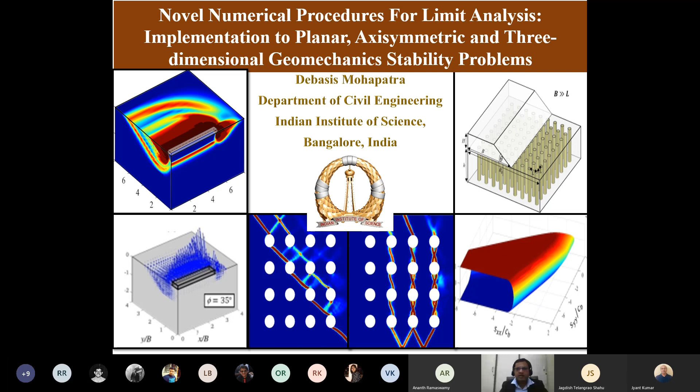About my dissertation work, which is on a novel numerical procedure for limit analysis and its implementation to planar, axisymmetric, and three-dimensional geomechanics stability problems.

This is the short thesis overview of my thesis. I have to speak a lot more, but the time is very limited, so I'm not going to focus on details about everything. I welcome questions at the end of my presentation.

At the beginning, I will introduce and discuss the theory of limit analysis. Then I will briefly discuss the objective of this present thesis work, and these blue colored points are my original contributions. I will briefly go through these contributions, and finally I will conclude the thesis by discussion about the future research work.

Stability problems are very common in mechanical and civil engineering, where we want to determine the maximum load carrying capacity of a structure, which is subjected to various complicated load, geometry, and boundary conditions. To solve this type of problem, we have different methods generally used.

These are the limit equilibrium method and slip line method. This limit equilibrium method and slip line method give very good, very accurate solutions. But the demerit is that these cannot be used for general purpose software development.

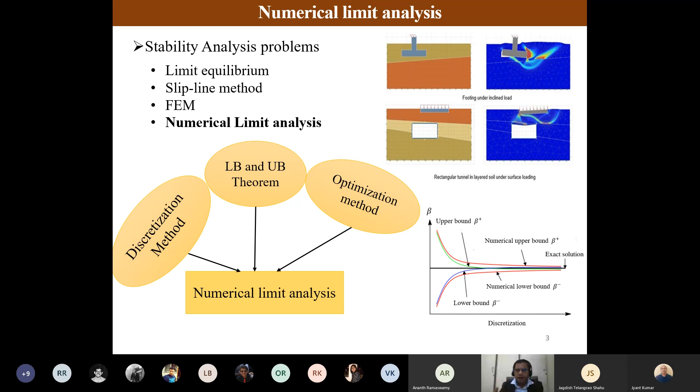These two problems are solved independently, and the exact solution lies in between these two bounds. Therefore, this itself is a self-validating kind of analysis.

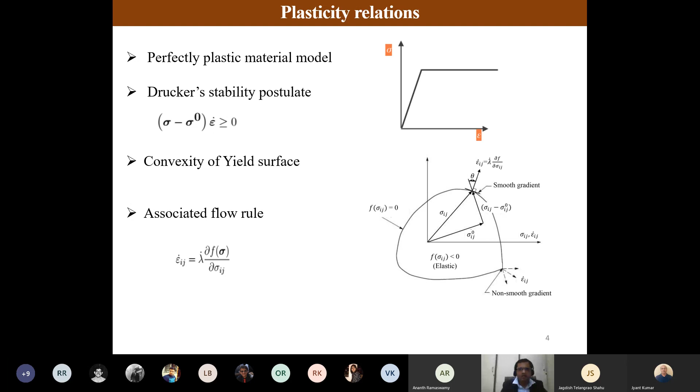Before proceeding further, we should be aware of what plasticity relations should be obeyed. So I assume the material is perfectly plastic, obeying Drucker's stability postulate. The yield surface is convex and the associated flow rule is being obeyed.

Under this condition, if omega is the domain of a body surrounded by boundary gamma, with displacement boundary condition gamma u and traction boundary condition gamma t, it is subjected to known body forces B naught and unknown body forces beta B. Beta is the load factor, the basic variable to be determined, and it is subjected to known traction T naught and unknown traction beta T. We also introduce some discontinuities within the boundary, because if a footing is resting on the soil domain, stress and velocity discontinuities are observed at the end of the footing, and these are well captured by introducing such discontinuities.

Based on these conditions, if we define the load, we obtain the load factor obeying equilibrium conditions, discontinuity equilibrium conditions, stress boundary conditions, and yield condition. The load factor obtained will always be lower than the exact load bearing load factor of the solution of the problem.

Therefore, we can convert it to an optimization problem to maximize the load factor to obtain the exact load bearing capacity factor.

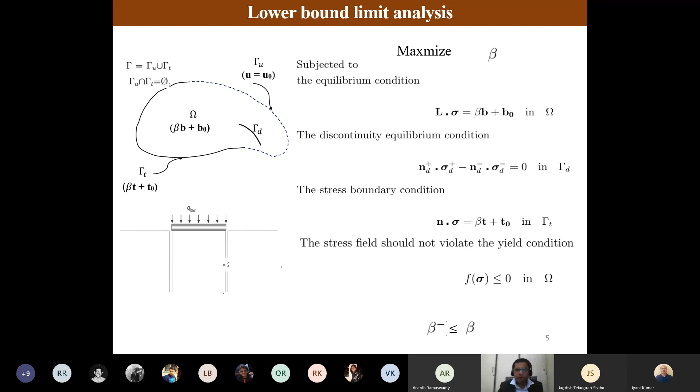For the upper bound limit analysis, we calculate the external work done by known body forces, pi naught, and unknown body forces, pi beta. The internal work done mainly has two parts: one due to power dissipation within the domain, and one due to power dissipation along the discontinuities. Then we equate this internal and external work done.

If the velocity and strain rate fields are kinematically admissible, the load factor determined this way always gives the upper bound to the actual collapse load. Therefore, we can convert it to an optimization problem to minimize the load factor to obtain the exact value of the load factor.

The load factor beta is always bounded between beta minus and beta plus. Therefore, we need to reduce the gap between beta minus and beta plus to obtain the exact value of bearing capacity factors. If analytical solutions are possible, then beta minus or beta plus will match directly. But for complicated geometry and complex loading conditions, these analytical solutions are never possible, so we need to use some discretization technique.

Before going to that, I want to mention that in lower bound limit analysis, stresses are the basic variables, and in upper bound limit analysis, strain rate or velocities are the basic variables. But the plastic power dissipation function and associated flow rule conditions are found to be dependent upon the stresses. So how to incorporate that into upper bound limit analysis will be one of the major research works of this present dissertation.

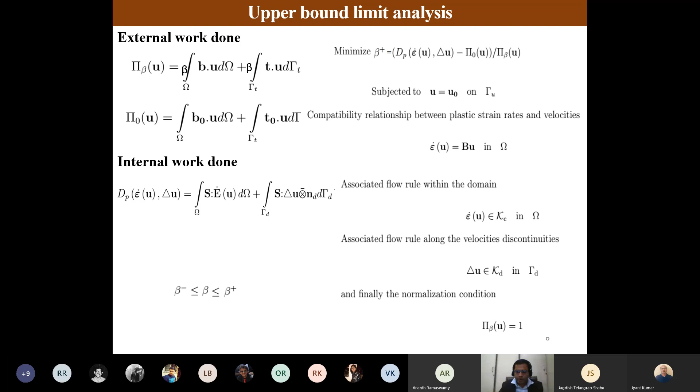If analytical solutions are not possible, we discretize the domain using finite element method, and obtain the constraints using lower bound and upper bound theorems. Using finite element method, those are converted to algebraic equations, and finally an optimization problem is formed, which can be solved using any optimization technique.

But the problems associated with finite element discretization are that lower order finite elements are generally used to obtain the rigorous solution, but the approximation by lower order finite elements is not that accurate, and volumetric locking issues always arise when modeling incompressible or nearly incompressible materials like clay and soil having low phi value.

Because the constraints associated with enforcing the flow rule condition exceed the degrees of freedom associated with the finite element method, no feasible mechanism could be developed.

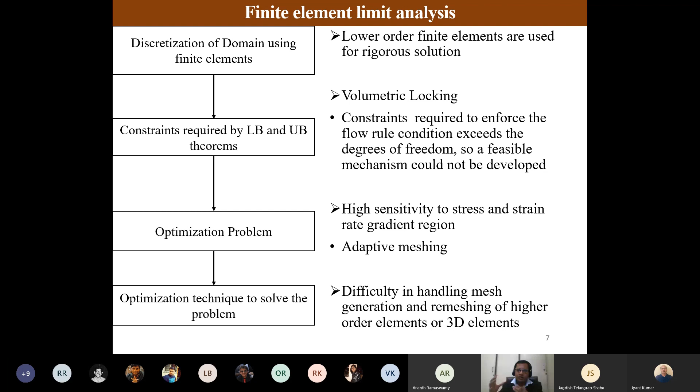Then there's high sensitivity to stress and strain rate gradients. Although adaptive meshing is a solution to that problem, generating unstructured mesh for higher order or 3D elements is quite difficult, and the adaptive meshing algorithm for higher order 3D elements is difficult and computationally not so efficient.

Another thing is we deal with optimization algorithms. The optimization problem we deal with is mainly nonlinear and non-smooth. Nonlinearity in lower bound analysis comes from the yield criterion, and in upper bound analysis comes from the dissipation function and flow rule constraints. Also, the yield function is non-smooth.

Therefore, in linear programming, we need a large number of constraints to satisfy, which is not a computationally very efficient approach. In nonlinear programming, the Hessian gradient should be well defined, which is not possible for the non-smooth yield criterion. That's why we need to approximate the yield criterion using some smoothing technique, which reduces the computational efficiency and accuracy of the approach.

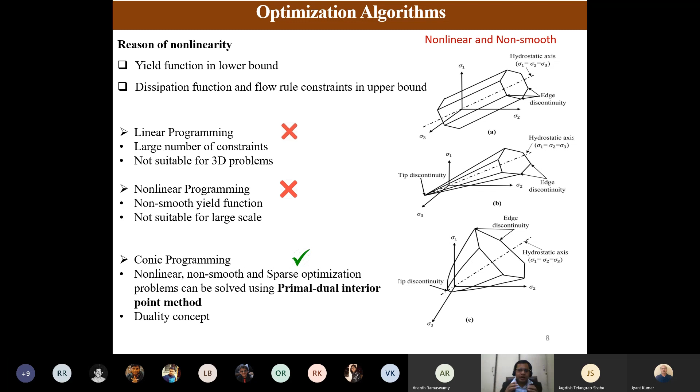Therefore, I have used the modern conic programming approach in this analysis. Although it has been used by some researchers, it is very efficient if the optimization problem can be formatted as a conic programming problem, since it can then be solved using an efficient primal dual interior point method. Another advantage is that we can easily define the duality of this programming. That's why it has huge application, which I will discuss later in this thesis.

Although conic programming approach has been used to solve Mohr-Coulomb yield criterion problems, how to solve rock mechanics problems or anisotropic or asymmetric soil mass problems has not been addressed by anyone. And although 3D formulation has been formulated, it has not been applied extensively in geomechanics problems, and that will be one area I need to explore.

Based on the literature review, I have condensed my objectives into four major areas: to formulate upper bound limit analysis problems using various discretization techniques, and expand the scope of conic programming to solve stability problems associated with soil and rock masses. As I have already discussed, the plastic power dissipation function and associated flow rule constraints depend upon stresses, but in upper bound limit analysis, I need expressions dependent only upon the kinematic variable.

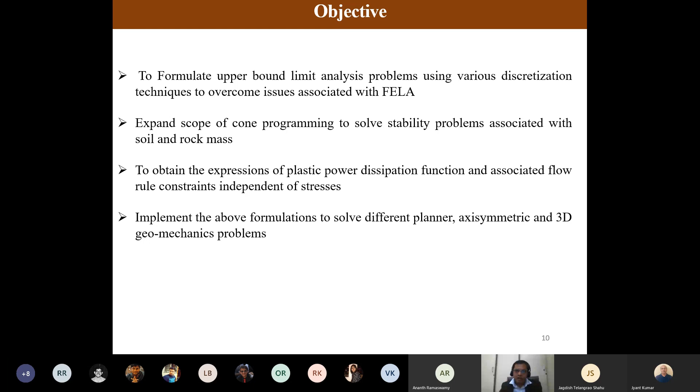That's why we need to derive expressions which are independent of stresses. That is one of the major objectives. And finally, to implement whatever development has been done to solve planar, axisymmetric, and 3D geomechanics problems.

Before proceeding further, I need to introduce conic programming. Conic programming is a type of program where the objective function is linear and the constraints and variables belong to different cones. Cones can be linear programming cones, second order quadratic cones, or semi-definite programming cones. In semi-definite programming cones, matrices are variables instead of vectors.

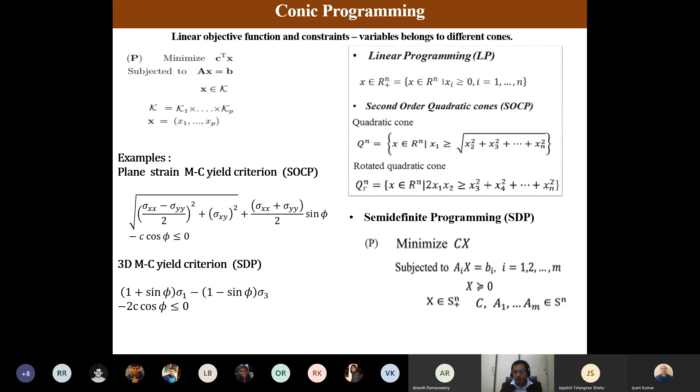For example, the Mohr-Coulomb yield criterion can be directly converted as an SOCP programming problem. But the 3D Mohr-Coulomb yield criterion, which is a function of eigenvalues sigma 1 and sigma 3, can be easily dealt with by using semi-definite programming.

This is my first contribution, in which I have proposed an upper bound finite limit analysis formulation for Mohr-Coulomb axisymmetric problems. The need for this study was that in axisymmetric problems, the hoop stress and hoop strain rate is introduced as an additional variable. So how to deal with that variable and what will be its contribution in yielding or defining the load bearing capacity needed to be addressed.

The second thing is that many people suggest that instead of constant strain triangular elements, if you use linear strain triangular elements, it can resolve the volumetric locking problem, or you can use velocity discontinuities. But I wanted to test the effect of different discretization procedures in obtaining the solution.

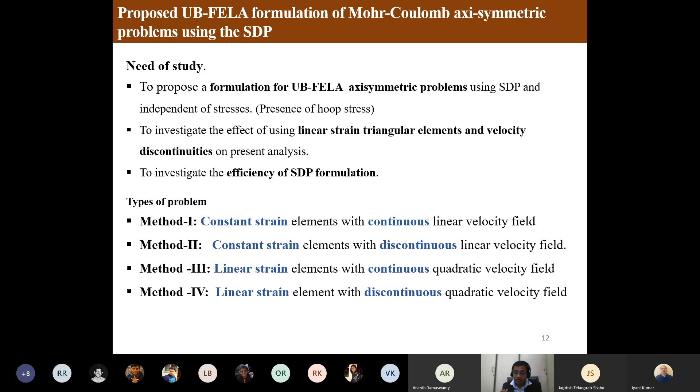That's why I used 4 discretization methods: constant strain with continuous and discontinuous velocity field, and linear strain triangular elements with continuous and discontinuous velocity fields. These 4 approaches were used to discretize the domain, and this diagram shows how the element discretization has been done and what variables are associated with each element.

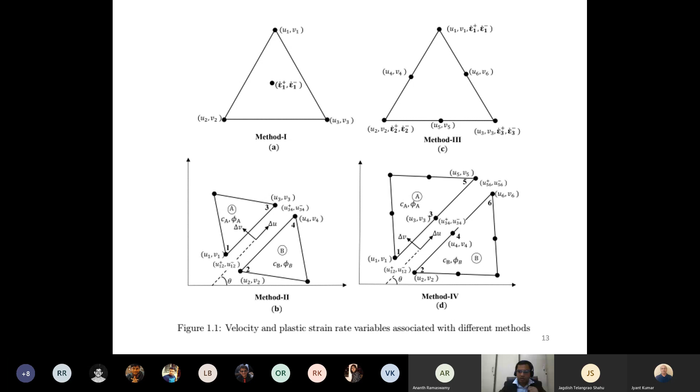I used this 3D Mohr-Coulomb yield criterion approach to solve my axisymmetric problem. So what I did in this approach, actually the strain rate is unconstrained in nature, but to solve it by using semi-definite programming, we need the variable matrix to be positive semi-definite.

To convert unconstrained, this can be done by expressing the unconstrained E matrix using E plus and E minus, a combination where both are positive semi-definite matrices. The physical meaning of E plus is strain rate due to dilation, and E minus is strain rate due to contraction. These expressions for the 3D Mohr-Coulomb yield criteria have been proposed by Martin.

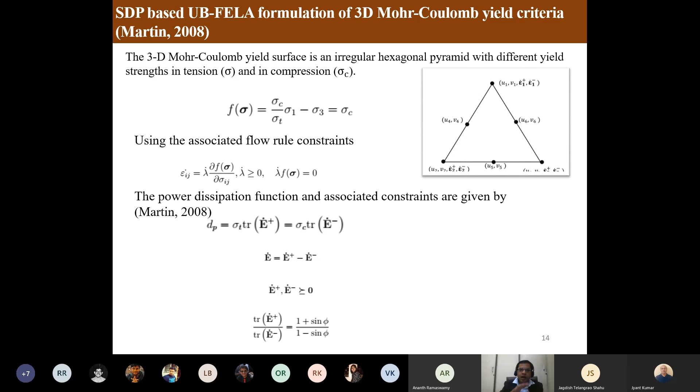I have made some modifications to consider my axisymmetric problem, and correspondingly I have generated the plastic power dissipation function and associated flow rule constraints.

I also need to consider the velocity discontinuity effect. For that, it is observed that the sign of delta V is the normal velocity jump along the discontinuity, and delta U is the tangential velocity jump along the discontinuity. Delta U can be unrestricted in sign, but delta V should be positive. So those things are addressed in the optimization problem as mentioned here.

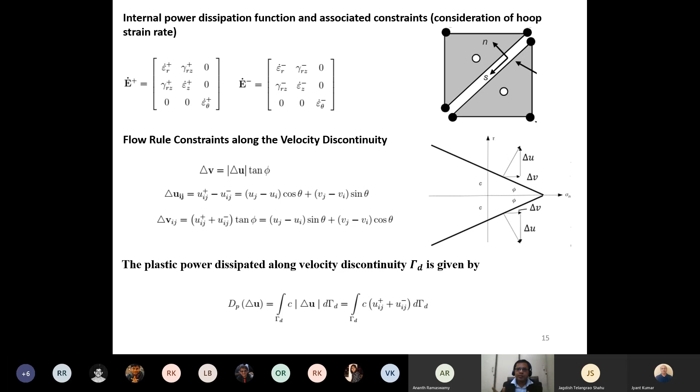I have also obtained the plastic power dissipation function along the discontinuities. Using all this basic knowledge along with the discretization procedures - the four discretization procedures discussed earlier - four different approaches to model the axisymmetric problem were generated, and used to solve an axisymmetric problem.

This is used to solve an axisymmetric circular footing problem. Here the elements are discretized such that a rectangle is divided into four triangles so that volumetric locking can be avoided. Also, wherever we know that at the corner of the footing there will be huge velocity and stress jumps, a very large number of elements has been provided there.

The results obtained show that, comparing with Martin's results which are based on the method of stress characteristics, the method 4 result - linear strain triangular elements along with velocity discontinuities - was found to be very close to Martin's results.

Other methods, method 3 (6-noded triangular elements without velocity discontinuities) and 3-noded triangular elements with velocity discontinuities, are found to be close to each other. But method 1, constant strain triangular elements, is not suitable for modeling this problem. Method 4 is found to be the best approach to solve this type of problem.

Method 4 takes almost double the time required compared to method 3. That's why I was dissatisfied, because first of all, if we don't address the volumetric locking issue by using this four-triangular division in a rectangle, we can't solve the volumetric locking problem properly. The second thing is we need to provide more meshes wherever required.

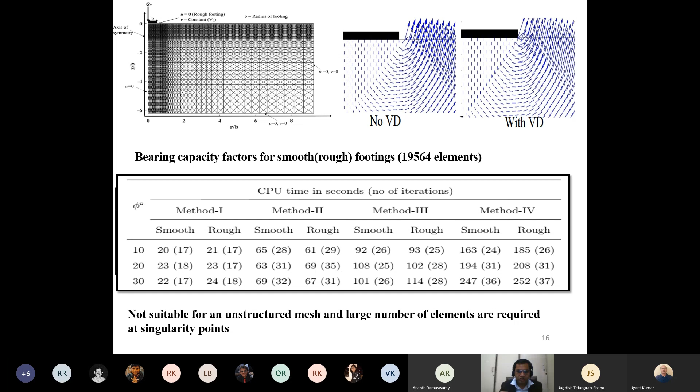That's why I was searching for advanced discretization procedures. The advanced discretization procedure I used here improves the solution of the 3-noded constant strain triangular element, because for constant strain triangular elements, many software packages are available for automatic mesh generation. It has automatic mesh generation capacity, helping us do adaptive meshing and unstructured mesh generation, capabilities other finite elements don't have.

This advanced discretization procedure is based on three concepts. First is the smoothened strain rate domain, where instead of evaluating the strain rate at one local point, the strain rate is evaluated as constant throughout the volume.

Using this, the domain integral is converted to a boundary integral. That's why instead of Gaussian points, we only need the length of the boundary, the normal of the boundary, and the Gauss point value at the midpoints to evaluate the integration and the strain rate. In this way, instead of a triangular element, we can use any domain to evaluate the strain rate.

Although velocity is interpolated as in a triangular element, for evaluating the strain rate we can use a different domain, called the dual domain. I used the dual domain concept to improve the factor of degrees of freedom by constraints per element, because this factor is very important for addressing volumetric locking. If this factor is higher, the volumetric locking will be reduced.

By using different dual domains, I formulated my strain rate vector. In the first case, it's a cell-based discretization. In the second case, it's node-based discretization, and another is edge-based smoothing domain formation. To the edge-based one, I added a bubble node, which was found to improve the solution very much.

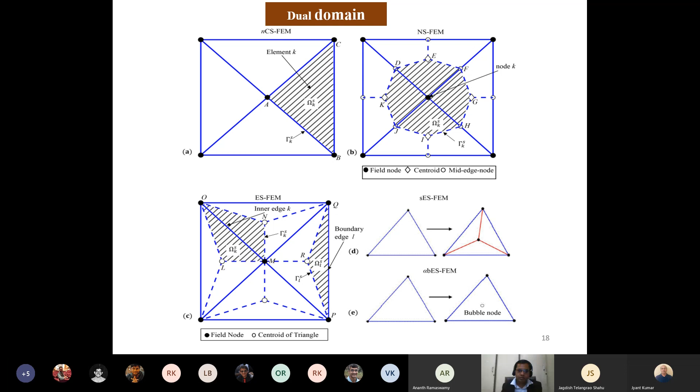I tested these five procedures and investigated which is the best procedure to address our problem, Mohr-Coulomb with limit analysis.

I used adaptive mesh refinement, based on two basic concepts. First is the posteriori error indicator, to indicate where mesh discretization is needed. Second, based on the error indicator, a mesh generator produces the unstructured mesh.

For the error indicator, I used the intensity of maximum strain rate. This was proposed by Martin: where the intensity of maximum strain rate is higher, more elements will be required.

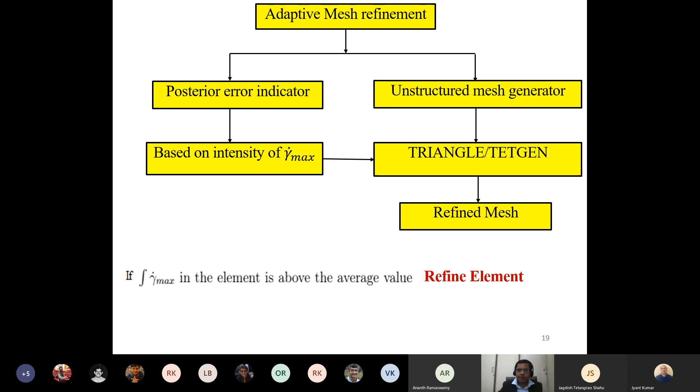Based on that, I used the Triangle software to generate the unstructured mesh. After each analysis, the error is determined. Where the error is more, a refined mesh is generated by the Triangle software. In this way, after 3-4 iterations, a refined mesh can be prepared.

The approach is: first we find the average strain rate over the domain and determine a targeted area. If the targeted area is less than the previous analysis area, we need to refine the mesh. If it is not less, we use the previous area as is.

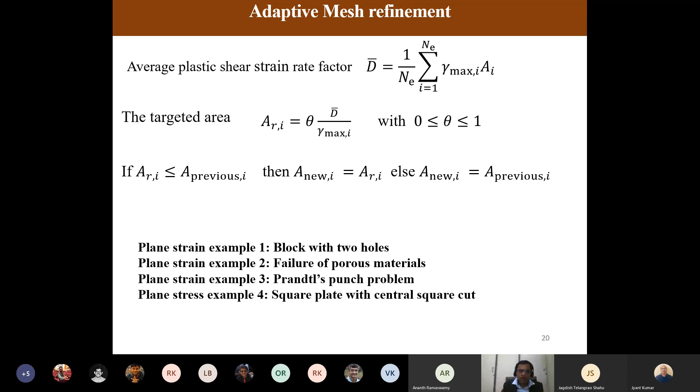Based on this, I solved mainly 4 mechanical benchmark problems and validated the results to find the best possible way to solve these kinematic limit analysis problems.

Due to lack of time, I'll discuss only one problem: the Prandtl punch problem, a strip footing problem. The objective is to determine the maximum value of load P. This was analytically solved by Prandtl, but here I used an initial discretization like this.

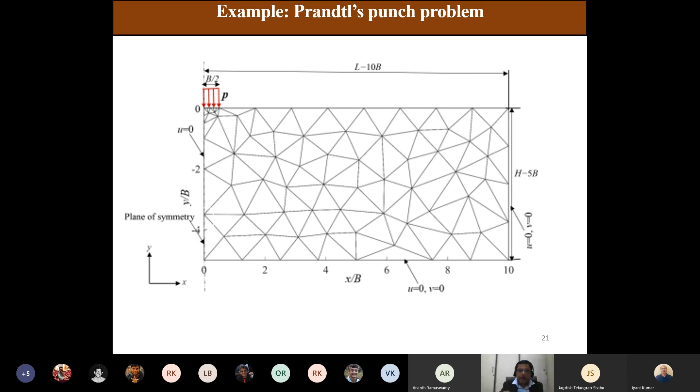After a few iterations, you can see the results.

Devashish, excuse me, which slide are you showing presently? Slide number? Okay. Slide number is 22. Oh, but here it is stuck. I think in mine it is showing 7 only. I don't know, anyway.

So Shahu, on the screen I'm seeing a take control option and a slide indicator. Please don't press take control. No, I am not pressing it. On the left hand side I see two arrows indicating slide 22 out of 59.

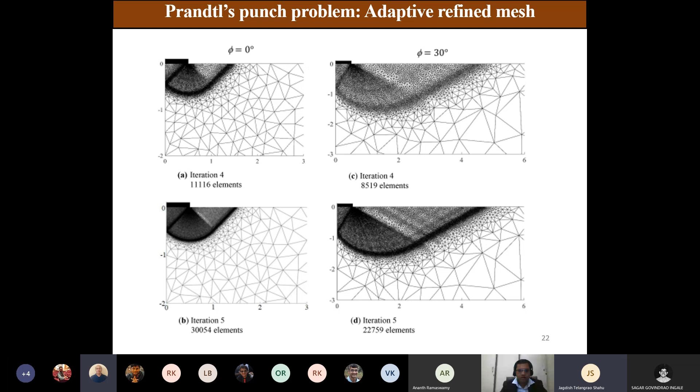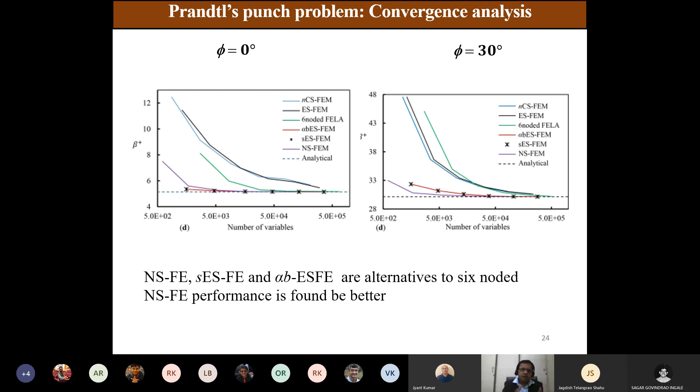Please continue. So this is how the plastic power dissipation function looks like. I have done the convergence analysis, and it is observed that the node-based smoothened finite element method, the selective edge-based smoothened finite element method, and the introduction of bubble node method are found to be alternatives to the 6-noded triangular element. It is observed that using very few elements we get a solution similar to the analytical solution, but I used more elements to check the stability of the numerical analysis, and these three methods are found to be quite stable. So the conclusion is that these three methods can be used as alternatives to the 6-noded triangular element. That is my conclusion from this work.

Then the next work is, I have analyzed an embankment resting on soft soil, which is improved by granular columns. This finite element modeling is quite difficult because introducing granular columns requires a very large number of elements to discretize the domain. Also, it is highly 3D in nature, so we can't use any simplification like 2D plane strain analysis, and direct numerical simulation is quite impossible in this type of structure.

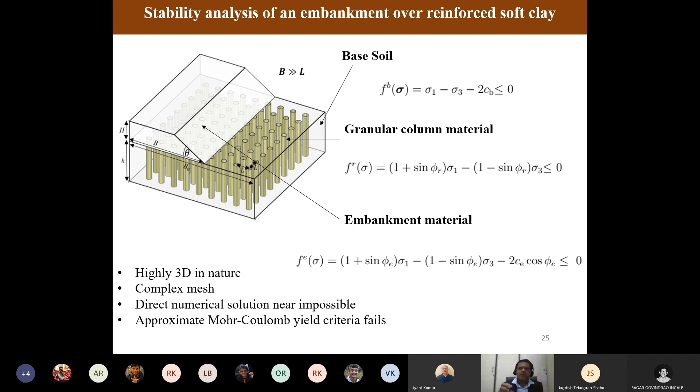So what I have done is address this problem by using composite material theory, homogenization theory actually. I have taken some parameters for how the mesh is and how the materials are. The base soil is a purely cohesive material, the granular columns are a purely frictional material, and the embankment is a combination, a C-phi material. I took this approach because it simplifies providing the stability charts.

So what is the homogenization procedure? If a domain is modeled by composite materials, modeling that domain directly is quite difficult. So we take a representative volume element and analyze it to obtain the modified property of the combined composite. We assume this property is obeyed throughout the domain, and we model the material using the property of the RVE, representative volume element, as a homogeneous material. So a similar concept I have used.

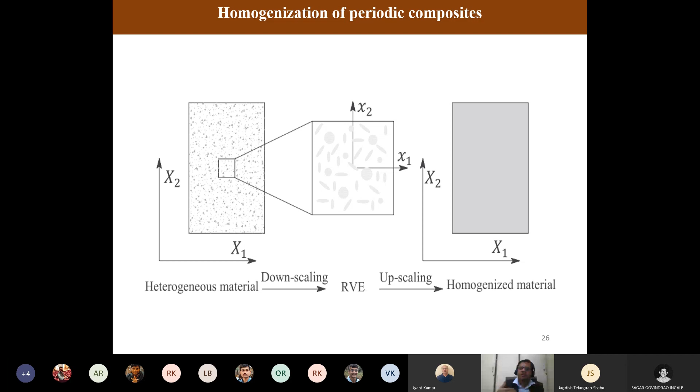I have taken a domain, a representative volume element, and analyzed it to obtain the combined yield criteria of the stone column and surrounding soil. Instead of the Mohr-Coulomb yield criterion or other yield criteria, I replaced it with the yield criterion obtained by solving this representative volume element. Although I don't need to solve the whole domain, I need to solve it using symmetry conditions and plane strain condition.

We need to solve only a small domain, and I have applied loads in different directions so that I can obtain the yield condition by varying the angles beta and delta. Wherever failure occurs gives a point on the yield surface. Similarly, loads are applied in different directions, varying beta and delta from 0 to 360 degrees, and the yield surface is obtained in this manner and plotted.

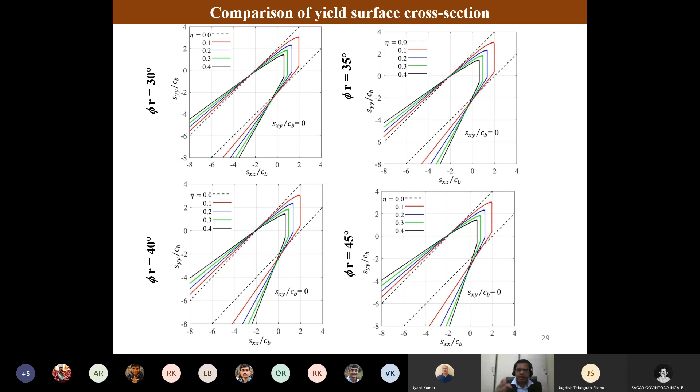So what I have done is used 7 ellipsoids to approximate this yield surface. I used a nonlinear least square method to obtain the parameters of the ellipsoids, and in this way the 13,000 linear constraints are converted to 7 ellipsoid constraints, which I have solved using this method.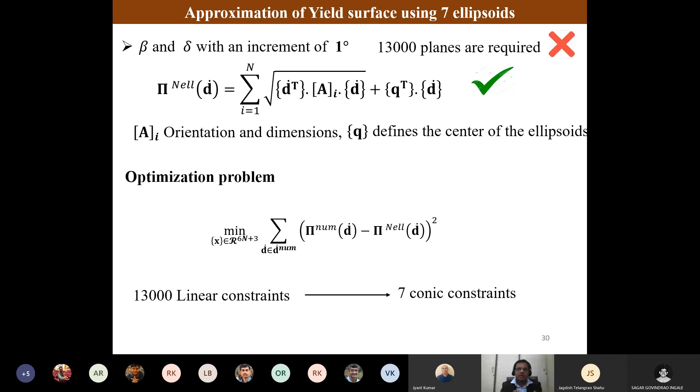Here the approximated result obtained from the 7 ellipsoids and the numerical solution is found to match very well with each other. So these are the following steps and parameters I have used to solve the problem.

And the steps are: first you give the input parameters, then analyze the unit cell to obtain the yield surface of reinforced soil, approximate that yield surface by using ellipsoids, and then add constraints to avoid the unboundedness of the strain rate direction. I mentioned it is unbounded in one direction.

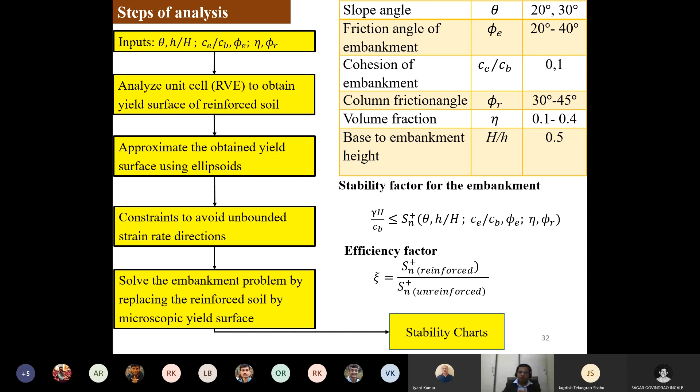Finally, solve the embankment problem by replacing the reinforced soil material using the yield criteria obtained from the RVE. This is done, and the different values obtained are presented in result format using stability factor and efficiency factor. It is found that this matches very well with the results reported by other researchers.

And this is the failure pattern generated. Initially, when there is no reinforcement, this was the failure pattern. With reinforcement, it can be observed that this does not go to the base, and this behavior is quite acceptable because the reinforcement increases the strength, which does not allow the material to fail in that direction.

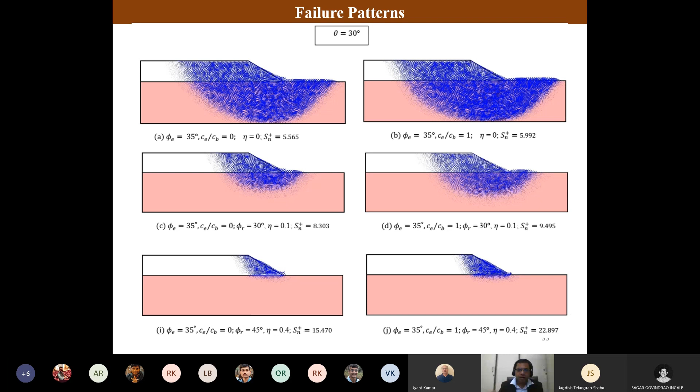So the next work was, as I have told already, conic programming formulations for Mohr Coulomb yield criterion are available, but what about rock masses, where the yield criterion used is Hoek-Brown yield criterion, which is very complicated in nature. Most importantly, the value of alpha also varies from 0.5 to 0.59.

Although it is observed that variation of alpha value has very less impact when GSI value is more than 30.

So what I assumed first to solve this problem is alpha equal to 0.5, and then by using the property of symmetric stress matrix, I converted this equation into these 5 constraints, where 2 constraints are conic SDP constraints, 1 is SOCP constraint, and the other 2 are linear constraints.

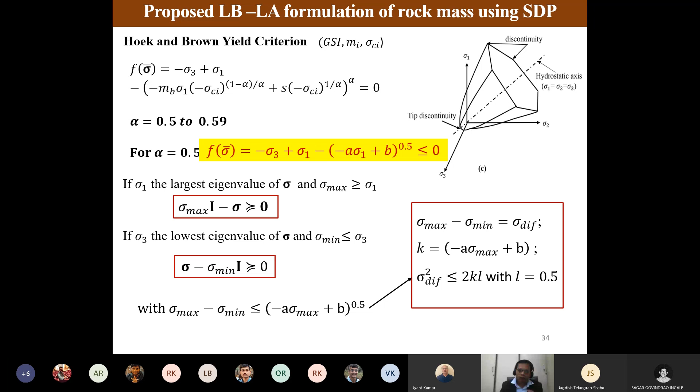So this yield criteria can be dealt with by using 2 semi-definite programming constraints, 1 SOCP constraint, and other linear constraints. In this way, I solved this SDP problem, and I analyzed the result by solving a strip and circular footing problem.

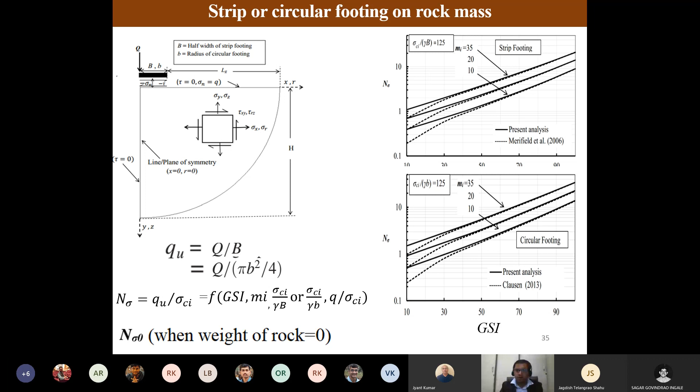As mentioned earlier, since I approximated the value of alpha as 0.5, for GSI less than 30, the behavior does not match with the behavior observed by other researchers. So to address that, I used an iterative approach.

This is the method I have suggested. After that, I have already discussed the plastic power dissipation function and associated flow rule as a function of stress. But we need to use upper bound limit analysis, which should be a function of velocities and strain rates.

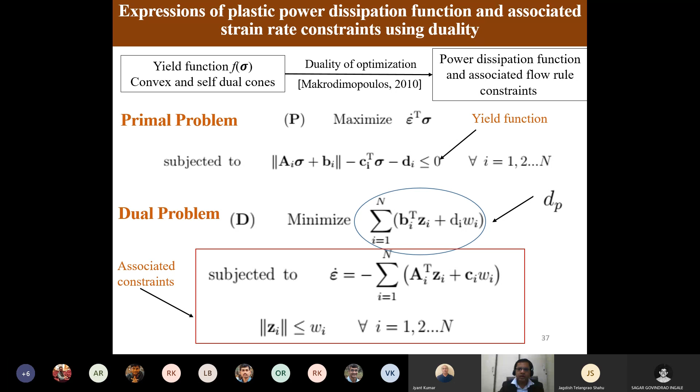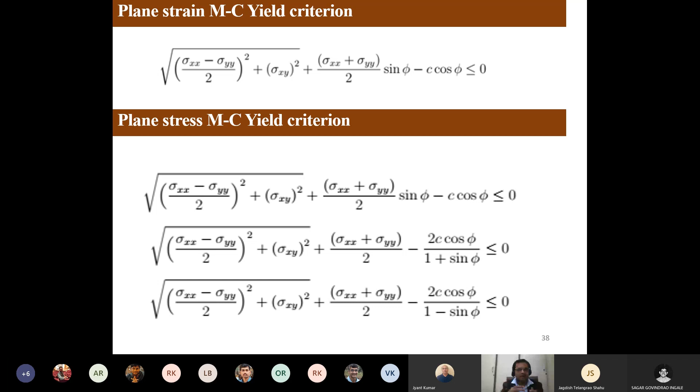This methodology I have used, and although Mohr-Coulomb yield criteria formulation using SOCP is already available, I used this methodology to verify whether our solutions are coming correct or not, also for Mohr-Coulomb yield criteria for plane stress and plane strain. It is observed that our solution matches exactly with the solution reported by other researchers.

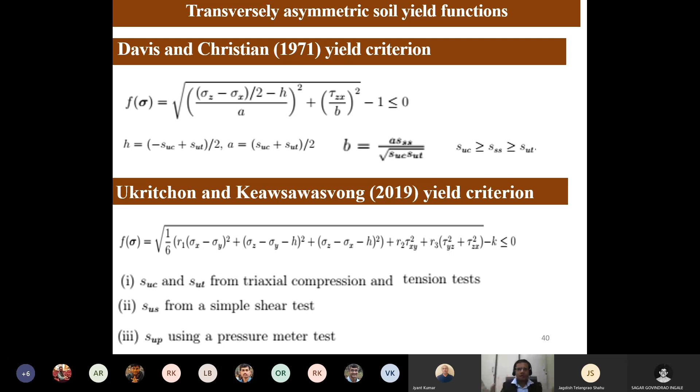Also, its 3D expansion, the Ukritchon and Keawsawasvong yield criteria, also comes under this generalized form of second order cone programming. All these yield criteria have been solved, with the plastic power dissipation function and associated flow rule constants obtained using duality of optimization theory as discussed earlier. The solutions have been obtained and verified.

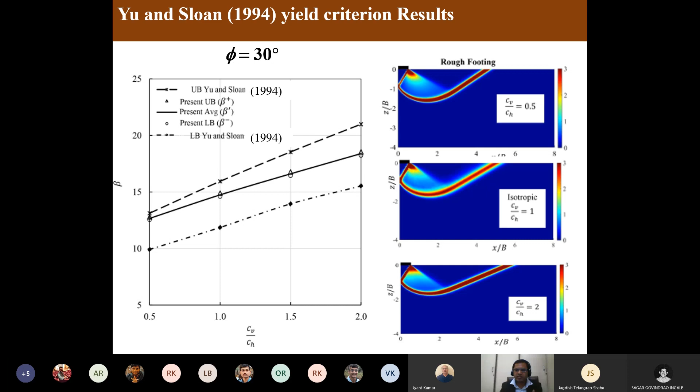I will discuss only one result, the Yu and Sloan yield criteria. It was already solved by limit analysis using a linear programming approach, and it was found that the gap between the lower bound and upper bound solution is too wide. But by applying our approach, SOCP duality combined with the linear strain triangular element, the gap between lower bound and upper bound is found to be very minimal, giving a much improved solution. Here the effect of anisotropy on the yield function and the plastic power dissipation function can also be observed.

So at the end, I have used the concepts of smoothened finite element method and conic programming optimization technique to solve a 3D rectangular foundation problem. The need of this study was to observe how to formulate the 3D kinematic limit analysis by using CSFEM and the radial point interpolation function, which is a meshless analysis approach.

There are many results available empirically or numerically, but there are many discrepancies. The shape and depth factor presented in the literature are considered independent, but it is observed that the depth factor obtained always depends upon the shape of the foundation. This is observed both experimentally and numerically. Also, the depth factor due to weight of soil is calculated as a combination of surcharge above the footing and unit weight below the footing, which is actually not the case.

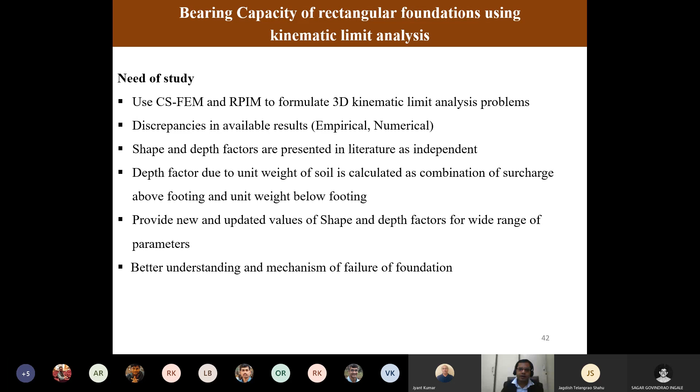It is a simplified method to calculate, where that needs to be addressed, and also to provide a new updated bearing capacity factor and to observe how the failure mechanism of a rectangular footing develops.

So I have used smoothened finite element method here by using a rectangular element, and also I have used radial point interpolation meshless method. The objective is that the interpolation is done by using radial basis function and polynomial basis function. Radial basis function is to address the singularity issue, polynomial basis function to satisfy the patch test, and the meshless analysis method is used as a validation to the CSFEM method.

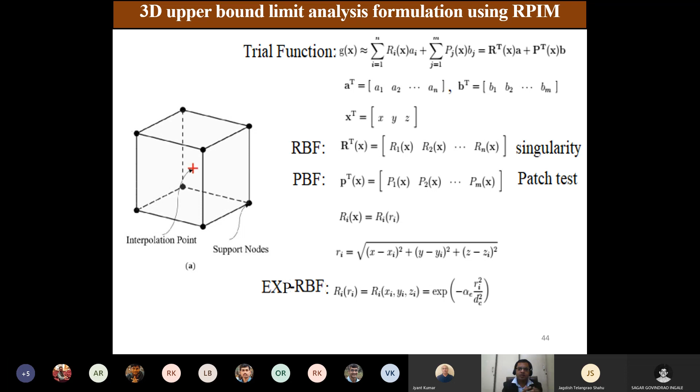It is observed that CSFEM method is more stable. That's why I have used the radial point interpolation method only to validate our result, whether it is coming correct or not. Also, this is the problem definition I have used.

Our foundation is at some depth, and the foundation's length - the thickness of foundation I have assumed as 0, because if I consider thickness of foundation as a variable, then it will increase the number of variables of the problem, and it will be difficult for us to provide the chart.

I have applied a vertical velocity in the direction of V naught, and I have assumed the footing is rough - that's why no velocities in the translational direction are allowed. Here the load Q is not due to weight of the footing, it is weight of the soil above the footing - it is additional surcharge load Q.

This problem has been analyzed. Another thing is that I have first obtained the shape factor, which is a function of L by B and phi, and the depth factor is now not only a function of D by B, it will be a function of L by B also.

This is observed from numerical analysis, by varying the parameter L by B from 1 to 5, D by B from 0 to 5, and phi from 0 to 45. This is the mesh discretization, and different charts have been obtained also.

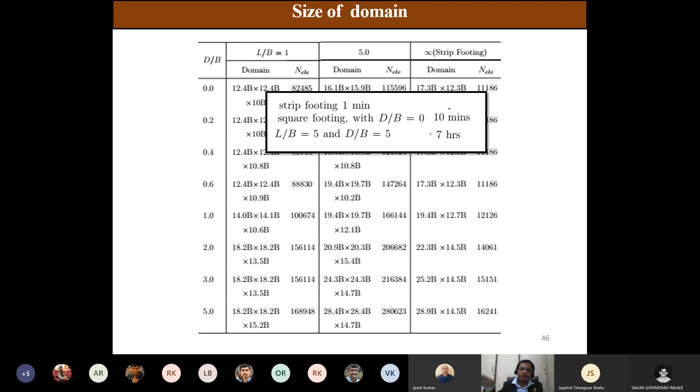The size of domain and number of elements required to discretize the domain is determined by using convergence analysis. It is observed that the final strip footing analysis takes 1 minute of time, while for a square footing analysis it takes 10 minutes. When using the large domain for which L by B is equal to 5, D by B is equal to 5, 7 hours of time is required to solve the solution.

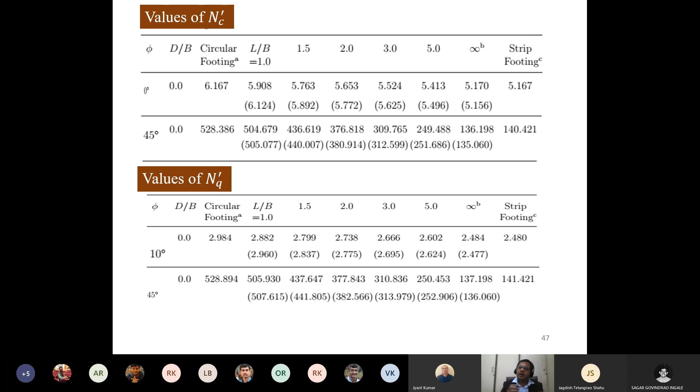These are some bearing capacity factors obtained. The bracketed results are obtained by using the radial point interpolation method, and are found to be quite well matched with the CSFEM method. But as I mentioned earlier, CSFEM is more stable in solving the problems.

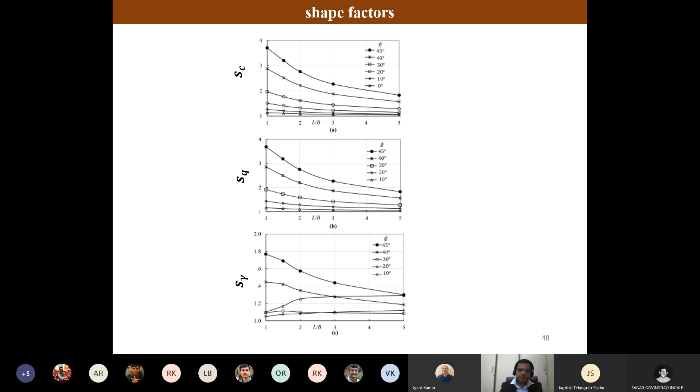That's why I have solved most of the depth factors using the CSFEM approach. This is the value of shape factors I have obtained, for different values of phi and L by B. It is observed that shape factor S gamma follows a different trend than SC and SQ. The depth factors are also obtained from different analyses, and have been reported.

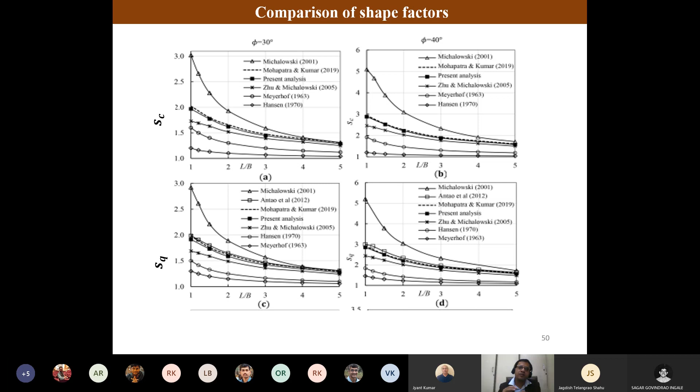It gives a slightly higher upper bound than the finite element results obtained, which proves that our method is quite good.

If you compare the depth factor, there are no numerical results available for it. That's why I compared my results with the empirical bearing capacity factors proposed by Hansen and Meyerhof. But you can see the difference.

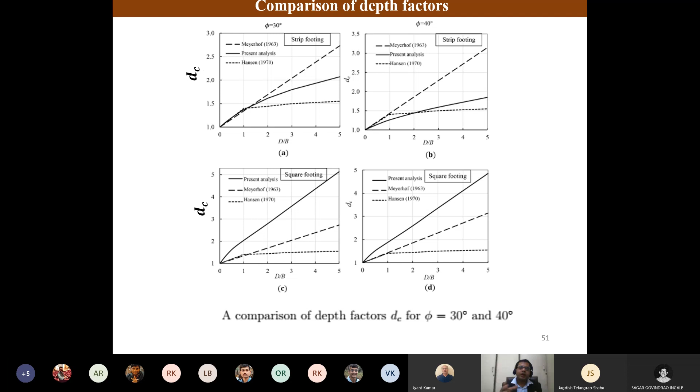This black line is my result, and the dotted lines are their results. It is observed that Meyerhof and Hansen's results show no variation in depth factor with change in the shape of the footing, which is not found to be correct in our analysis, and this is also observed experimentally.

We have also presented the values in chart form, and this has been published in a good journal as well.

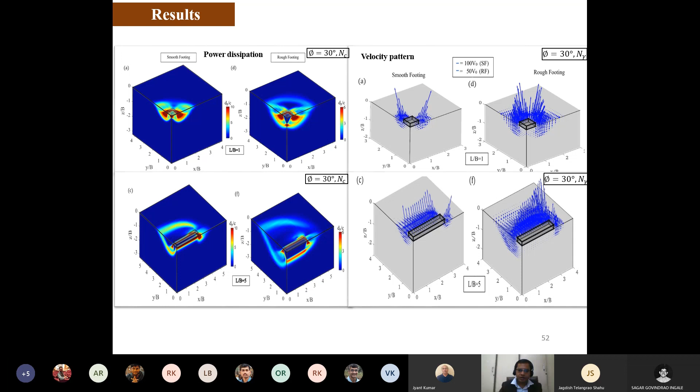Finally, these are a few diagrams showing how the velocity and plastic power dissipation function develop, and also how the plastic power dissipation function develops when placed at some depth.

With that, I am going to conclude this presentation. These are the major contributions. An upper bound limit analysis formulation has been proposed to solve axisymmetric problems using SDP, higher order elements, and velocity discontinuity.

Advanced discretization techniques, which consider smoothened finite element, dual domain, and adaptive meshing procedures, have been used to solve kinematic limit analysis problems.

It is observed that node-based smoothened finite element method, selective edge-based smoothened finite element method, and edge-based smoothened finite element method, along with addition of a bubble node, provide a better alternative to the linear strain triangular element traditionally used.

A 3D formulation for kinematic limit analysis using CSFEM and radial point interpolation method has been proposed and implemented to solve the bearing capacity factor of rectangular and square footings.

The lower bound formulation for rock mass using the Hoek and Brown yield criteria has been proposed.

The plastic power dissipation function and associated flow rule constraints for anisotropic and transversely isotropic soil have been proposed and validated with available results.

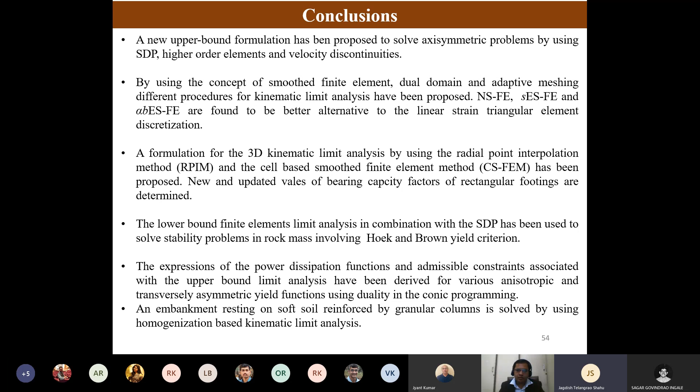So I think they are okay? Yeah, they are okay, if tension is positive. Just a minute, 8.2, let me check out. Okay, it is something related to the tension and compression signs. Yes, I hope so. So you have taken tension positive? Generally in geotechnical engineering, they take compression positive to express those things, but I have used tension as positive. That's it.

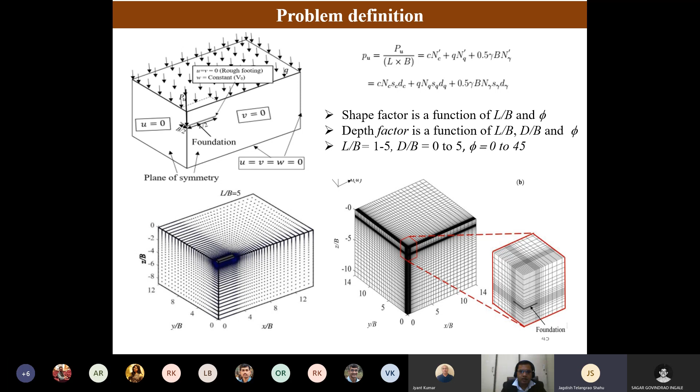Then you have used the unit cell concept. Yes sir. So what is the assumption made for the unit cell concept? Can you tell the basic assumption? So the basic assumption here is...

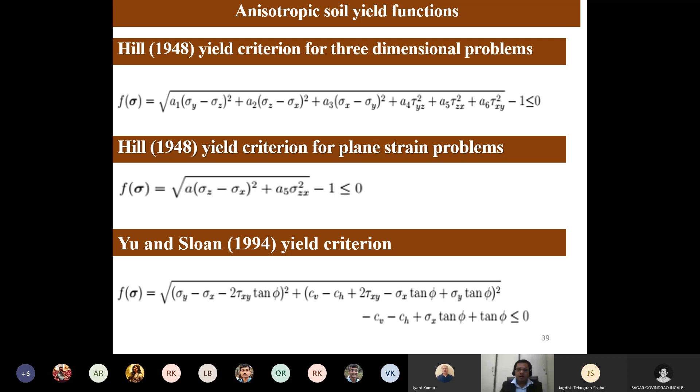I am assuming soil to be isotropic, and the model of one unit cell does not depend upon the model of the nearby unit cell. Whatever parameters are obtained for one unit cell does not depend upon the nearby unit cell; both are independent. Also, I am assuming that the unit cell nature has been periodically followed throughout the structure. This pattern is periodically followed.

And in the third direction there is no other loading; it is a 2D case, with no vertical load or variation of loading in the third, Z direction. So for your problem which you have taken, is the unit cell concept applicable? Yes, I have told you already, it has been used in finite element analysis very frequently, because directly solving this type of problem using finite elements is difficult due to the number of elements.

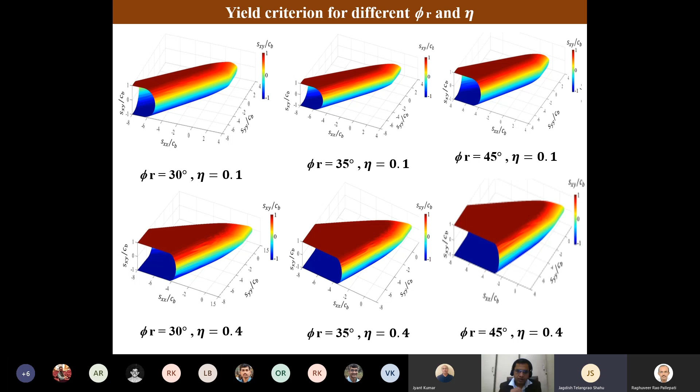Can you just—I am not able to see your anisotropic soil yield condition slide. Just a minute, let me join again. The slide has stuck.

Okay, so now in this problem, what about the unit cell beyond these boundaries? I have used some periodic boundary condition, they call it periodic boundary condition. The boundary condition is such that it will not allow rigid body motion, and it is satisfied in such a way that it follows the periodic condition.

It means the parameters determined for the unit cell will not affect the parameters determined for the nearby unit cell; that's why some boundary conditions here are fixed. Although it is an assumption that the unit cell itself will be independent from the nearby unit cell—my question is on the boundaries, do you have any columns on the lateral boundary? No, there are no columns at the boundary.

Why? I don't understand why it fails along the boundary. Because there is only soil there, no stone column on the boundaries. So if your slip circle passes through, then on the boundary there will be no stone column.